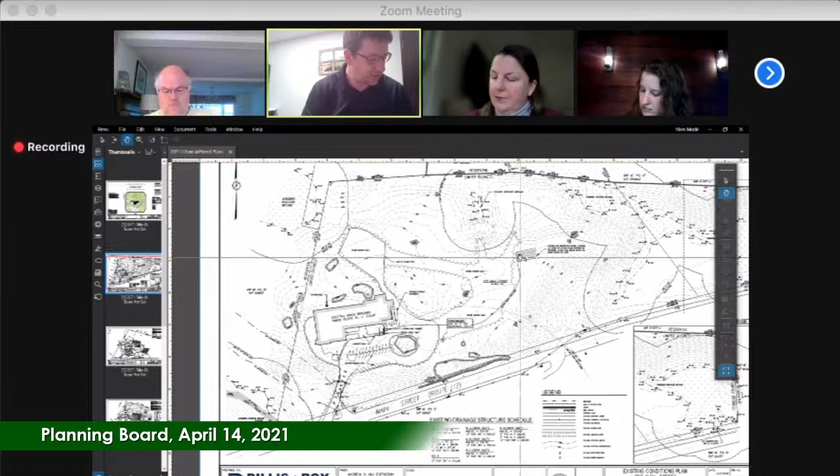What the applicant is proposing to do, we jump to this site layout plan, which is zoomed in slightly, is to maintain the existing building footprint, restripe the parking lot, and slightly expand the paved area to provide sufficient parking to meet the town of Bolton's requirements for a building of this size. There's not currently plans to have that many employees, but while we are submitting this application and doing the site work, we wanted to bring the site up to compliance with the parking regulations.

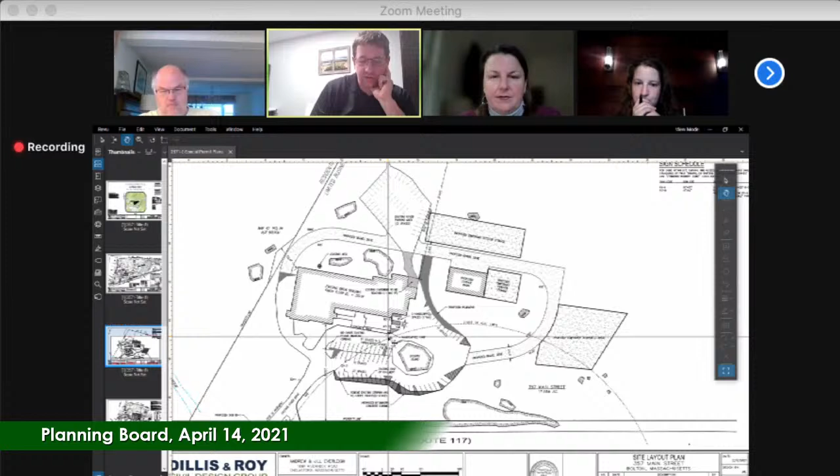All that additional pavement is shown in this gray hatching around the site here and here, and slightly here. We wanted to make sure that there was sufficient room between the existing island and the existing concrete walk to provide a 22-foot aisle through that area. It was a little tight when we were looking at the design.

We're also proposing a gravel drive around the back of the site, which will provide full access around the building, tying into some existing pavement at the west side of the building. The proposed storage barn is here to the east of the building, and then temporary storage areas for materials developed during the construction of pools are located here, and in this spot here.

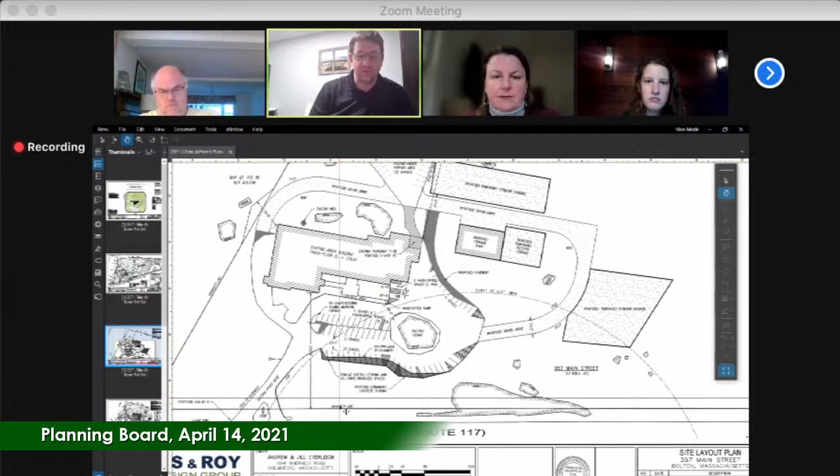It should be noted that the building itself is approximately 200 feet back from the roadway, with a fairly substantial planted buffer, well-established trees between Route 117 and the parking area and the building itself. There's also quite a bit of ledge on site, as you can see in this area. So we were somewhat limited in where we could put drainage, as we'll see on the next page. If I'm going too fast and anything pops up, please feel free to interrupt me.

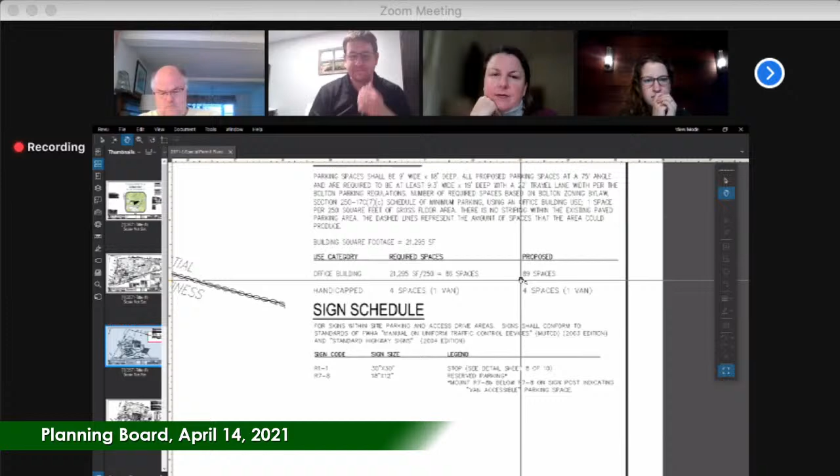Actually, this is Eric. I do have a question on the parking. What was the calculation that you came to for number of spots for parking? So with a use category of office, we came to a required 86 spaces. And when we restriped the parking area, we ended up with 89 spaces plus 4 accessible spaces. I don't have the new parking bylaw on hand, but that does seem excessive for your use. Would we consider this office? Do we have like a service category? I thought we did. Danielle, do you remember?

I don't remember off the top of my head, but I wouldn't necessarily consider this office, because, correct me if I'm wrong, you're not going to have individual offices in there, right? Or I guess if you want to describe what it's going to look like on the inside. Correct. Andrew, this might be a good time for you to step in with how you're planning on using the facility. Yeah, so the main use of the inside of the building is going to be individual offices for employees, and then we're also going to have a showroom outfitted to showcase some of the products that we use and some examples of what we do to clientele that come in.

How many offices do you anticipate having? I think we were looking to do right around 10. A lot of it's going to be open space offices, maybe multiple people in one area, not just individually closed walls. Yeah, so the idea of the latest parking bylaw was to not overburden the layout with excessive parking. So I don't know if you think 89 is right, or if you think that's excessive. We were just trying to make it a fit design. Our approach had been to come in with a clean application and not seek any kind of parking relief.

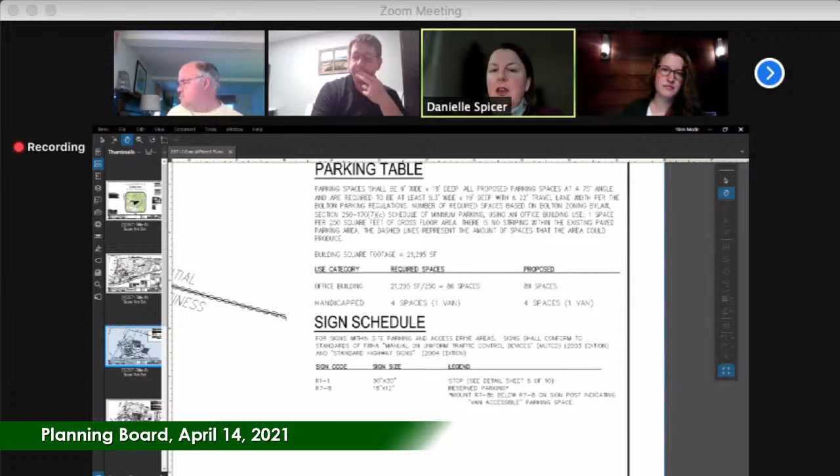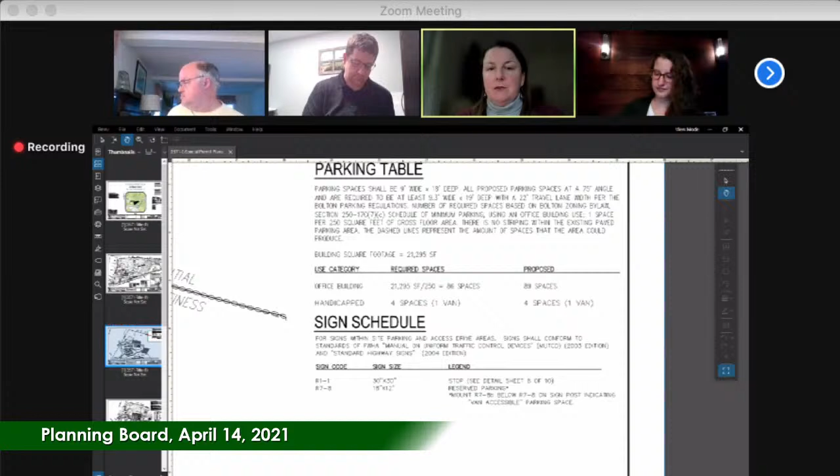Okay. You mentioned you're only going to have a small portion of this building that's dedicated to office. So whatever the square footage dedicated to office, you'd need to do the required spaces per that. But the rest of it would be looked at as a different use. And part of the whole parking bylaw was allowing these different uses to have different parking requirements, and maybe it's a shared parking. Obviously it's all pretty much one use, just different square footages.

Whereas if this had multiple different tenants, you could have a use that was really heavy in the morning versus another one that was really heavy in the evening. It doesn't make sense to just add them consecutively. It would make sense to actually offset them and look at more of a shared parking use. So there was a lot of leniency given towards developers to say, don't just call this one building, unless it was all office.

But where you've got clearly different uses within the building, like you just mentioned, 89 spaces seems absolutely excessive for this. So if it's not needed, let's look at what the actual office space is, and then what's the other category for the rest of the building. And most likely that's going to have a much smaller requirement for parking. Yeah. So if we're 6,000 square feet of office, that would be 24 spaces.

So we're down somewhere around a quarter to a third of what we're showing. You still have to add the spaces for the rest of the building. It's just going to be at a different rate. It's not going to be per 250, so what we're saying is if you look at the latest parking requirements, see what makes sense for the rest of the building.

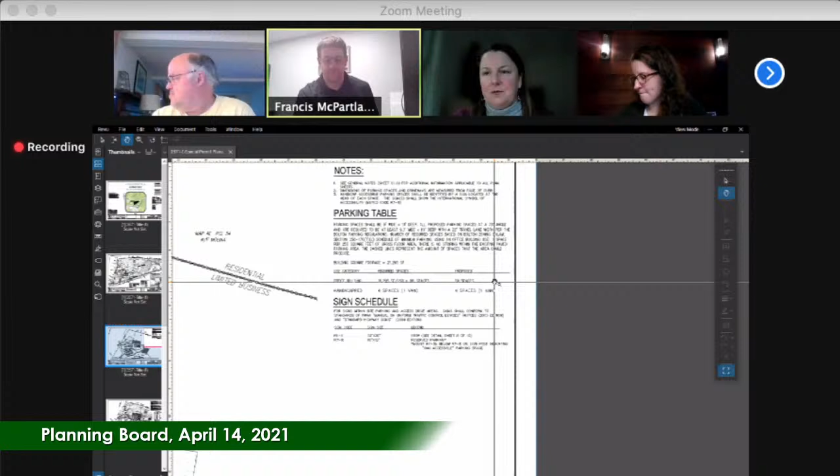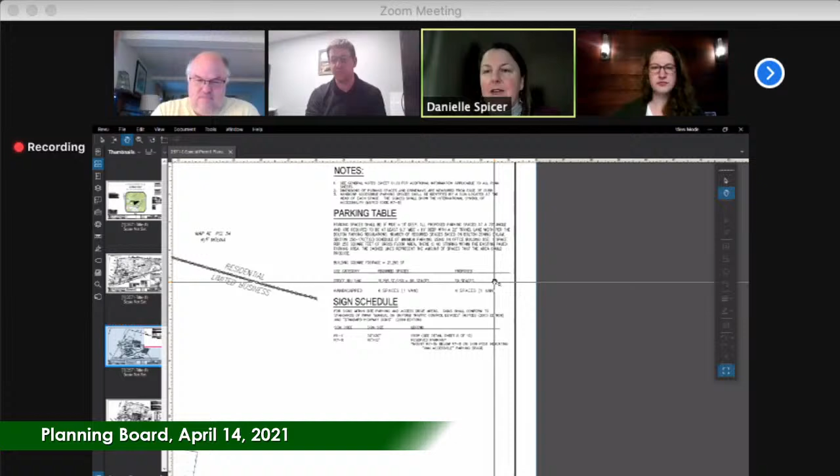Yes, and sorry, I'm bouncing back and forth between another screen trying to see if there's an easily used appropriate use. It may not be straightforward, but something that makes more sense than office for the rest of the building. It looks like there's maybe a manufacturing use that might fit, and that's 1 per 800. So even if we did that, that would put us at 44 spaces total between the two uses, which would just cut it in half. Yeah, it sounds like that would make everyone happier.

Yep, thank you. Okay, continue. Yeah, thank you for that feedback.

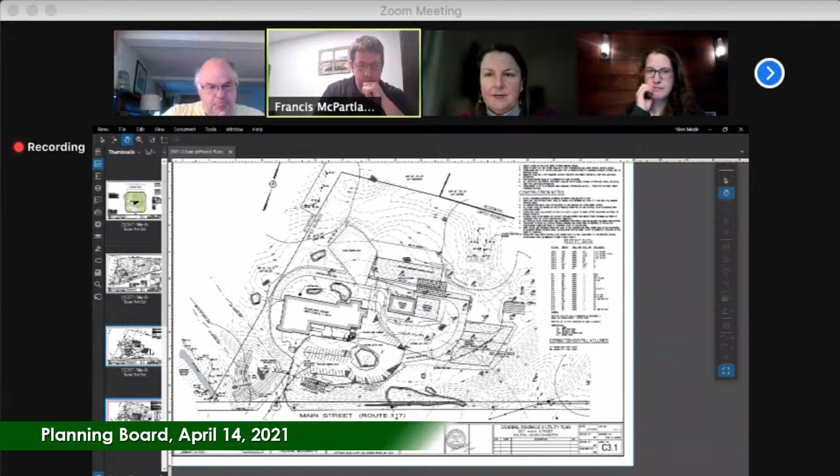Moving on to the grading, drainage, and utility plan. One question before you do. Yes, Mark. On the right side, there's a little triangle there, where the driveway is by the building. This here? No, just slightly up and left from there. Oh, where you were. This?

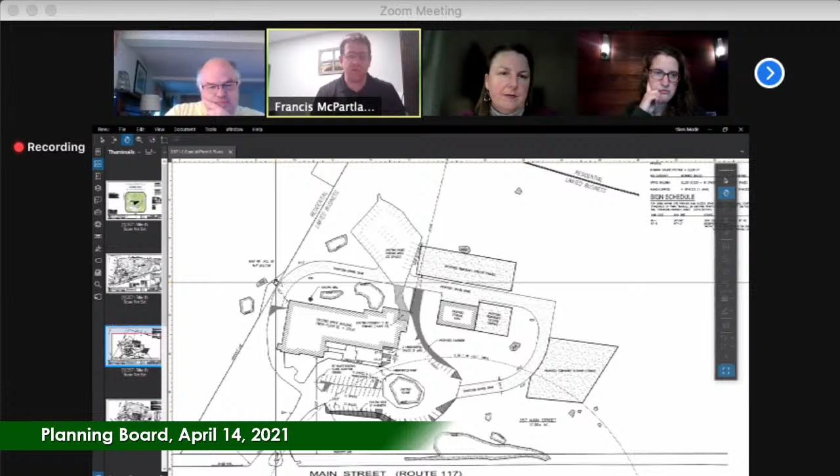Yes. At one point, well before I ever became involved with this property, it was a much larger parcel. And a good portion of that was conveyed to the town of Bolton as either conservation land or open space. So this is a town of Bolton parcel, but because of where the building was, they needed to maintain some kind of setback; it looks like the intent was 50 feet and it ended up being 52.9. So the property line, and I'll just mark this up real quick so we can see it.

Property line goes, bear with me, from along this line out to here and down and like this. Okay, so that red line is the property line.

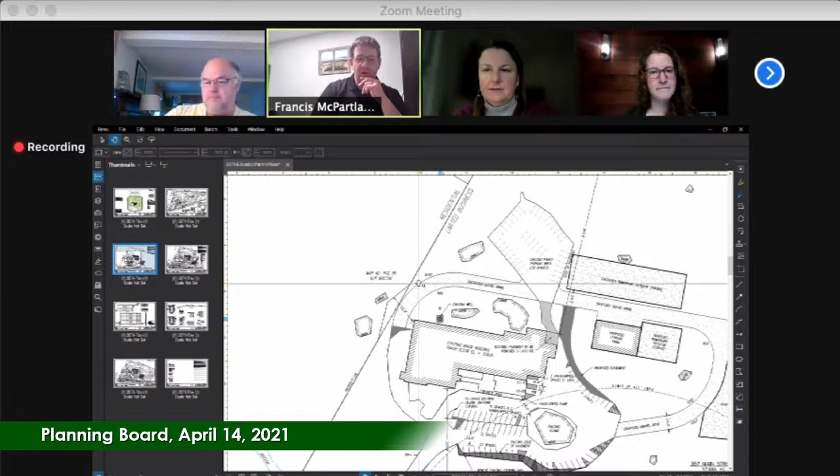So a little sliver is in the residential and the rest is in the limited business. Yes, you are correct. So that's pre-existing, so you're not looking for a land swap or anything like that there. No, we're not looking for a land swap, and all of our proposed activity is within the limited business.

Okay, jumping onto the grading and drainage plan. What we have proposed is the construction of a berm at this end of the site to create a small basin. Because what happens right now is there are 2 existing catch basins, and they just discharge right to existing grade, and that dumps right down into the wetland and the stream down here. So what we're proposing as part of our stormwater management on the site is construction of this berm and sediment forebay to provide stormwater management flow control and TSS removal prior to discharge at this location.

So will that be like a constructed embankment so that there's no breakthrough and stuff like that? That'll be a constructed embankment. We've been finding - let me check the detail before I speak here - but we've generally been finding that impervious layer barriers haven't really been needed on the basins here, so it would just be an earthen berm.

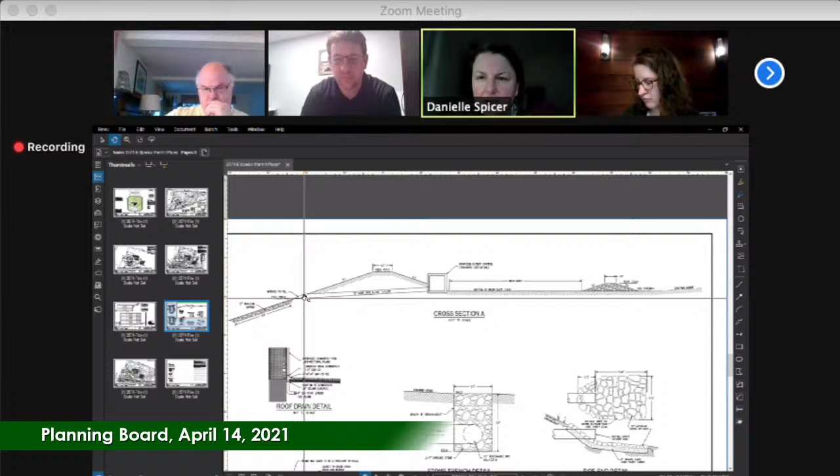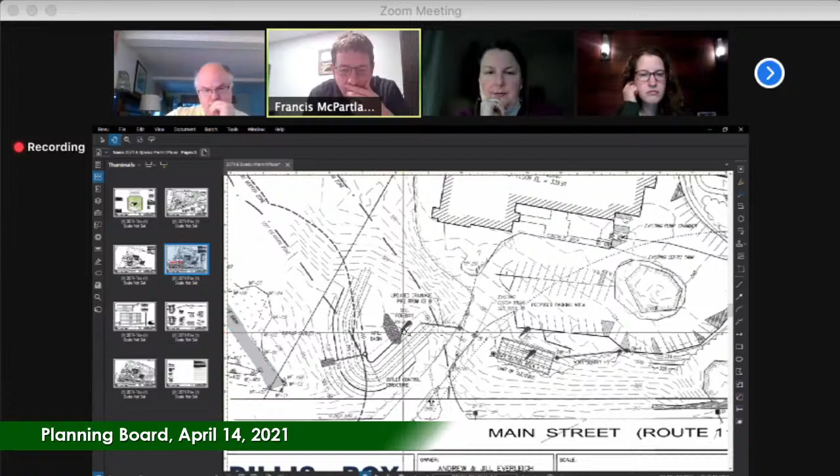Okay. And do you have, so the bottom of your basin's at elevation, I think it's 310. 310, yes. What's your depth to either ledge or groundwater? Our depth at that location, so this is constructed entirely in fill, so we're not cutting, or maybe a very minimal cut. And I'm looking for my test pit 8069.

I mean, if it's all in fill, most likely you're fine. Yeah, it's most likely in fill, 8069. We had a 74-inch deep test pit at that location, and groundwater was observed at 70 inches. And you obviously didn't hit ledge. We didn't hit ledge there, no. And if I remember right, that 70 inches roughly corresponds to the stream that's down there. Okay.

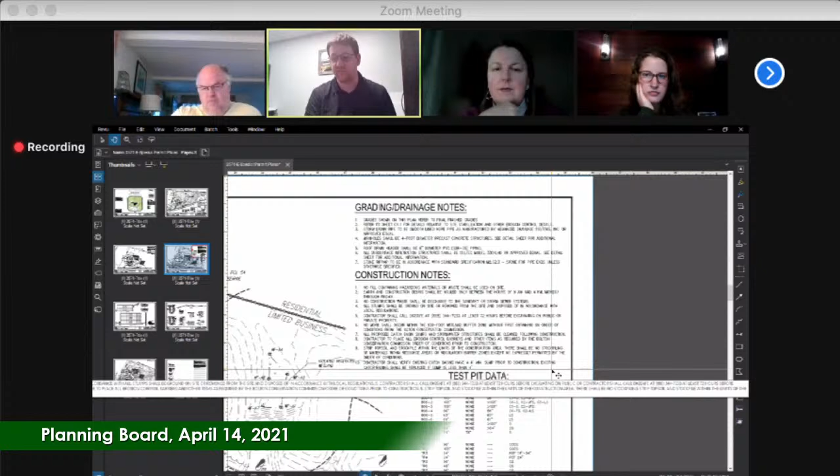Calling out on existing catch basins on note 10, we're having the contractor verify that the existing catch basins have a 4-foot sump. And if they do, we're having them be left in place, but if they aren't deep sump catch basins, we're directing the contractor to swap them out. Okay, so there'll be a full treatment train of catch basins to sediment forebay in that location.

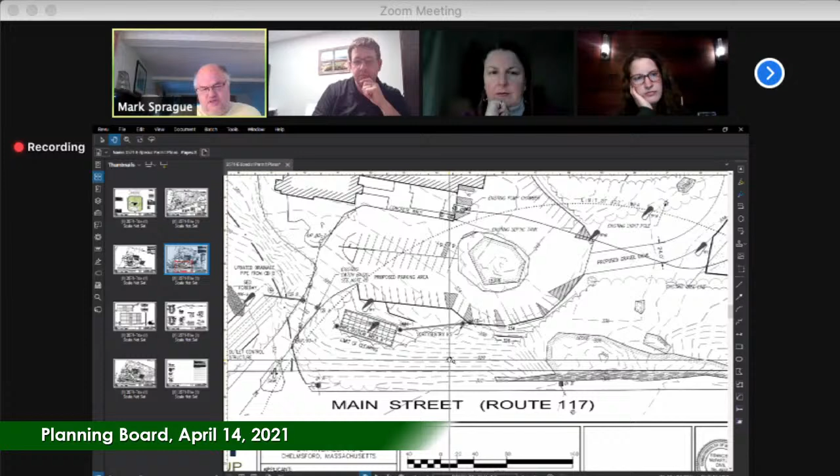So that will remove most of the vegetation that's screening the property on that side, right? On this side, the vegetation would be pulled back about to the property line. Yes, for this side.

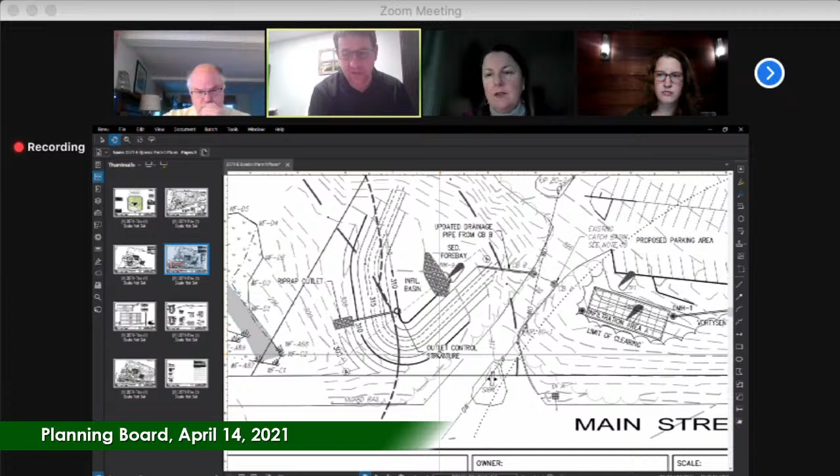And I'm assuming by enlarging the basin as well, you're meeting your peak rates for the 2, 10? We are meeting peak rates for all storm events, and that was documented in our report. But are you meeting peak rates and peak volume? We are meeting peak rate, let me see if we documented volume. I know we're meeting our recharge requirements too, so that tends to meet volume. We're not discharging from either one of the infiltration systems. So the two infiltration systems that are proposed are providing full volume, full recharge up to the 100-year storm. So I can prepare a table to document volume.

Yeah, if you can just - that was a bylaw, or that was a change, 1 year or 2 years ago, I can't remember - but to document not just peak rates for the same storm events, but also peak volumes, for both existing and proposed. Yes. I'm sure that we are, because as I said, there are two subsurface infiltration areas picking up the rest of the disturbance, as well as some of the existing parking and impervious areas, so we're fully infiltrating those.

So you've got your parking lot that's above, it's going to - was it catch basin 1? - and then it's going down to this subsurface basin, and then is there an overflow from there, or what's... This does have an emergency overflow. This structure here is basically a catch basin that if this system is in failure, or it gets more than 100-year flow that it can handle, it will bubble out there and it won't back up. Yes, and then we'll just overflow.

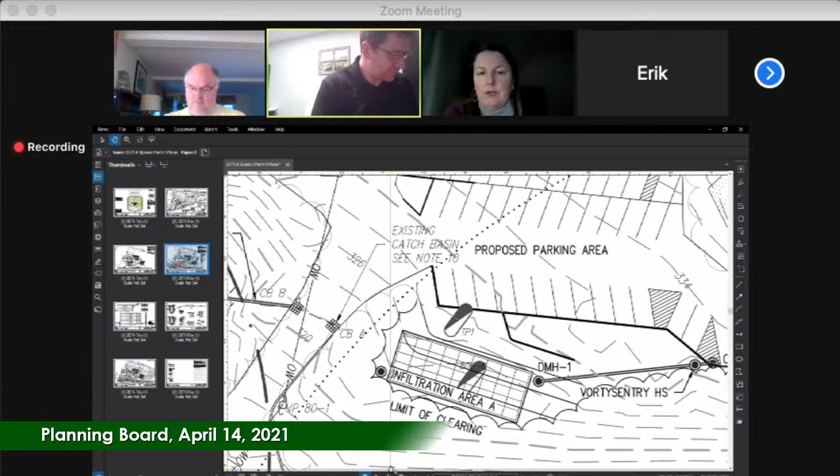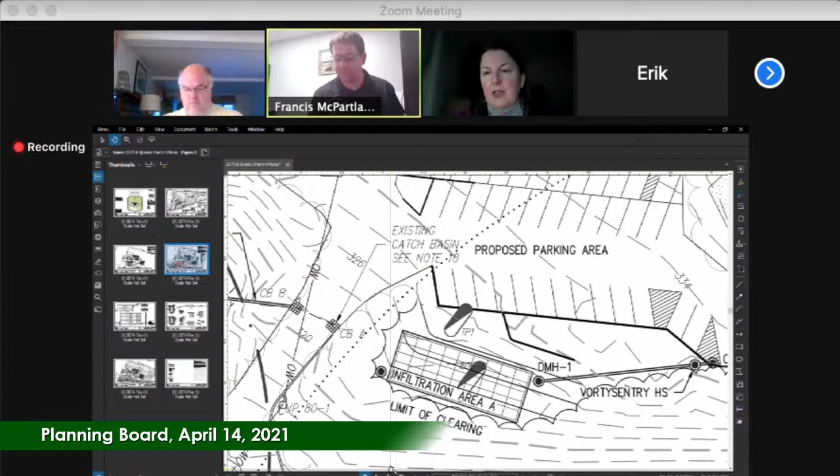I don't want to speak out of turn on this. It might be in the HydroCAD calcs that were provided, it spells out the rainfalls themselves. I just don't remember offhand what the number is. It was, we have a 7-inch for the 100-year storm, but I don't want to speak in the affirmative until I confirm. You can just follow up with that. That'd be great.

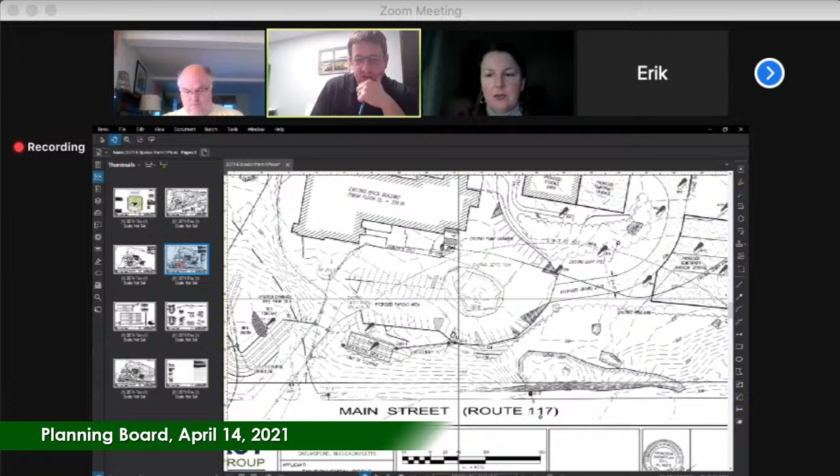So we also have in the back here a secondary infiltration area, collecting both the runoff from the proposed storage barn as well as runoff from the grading and construction in the back here.

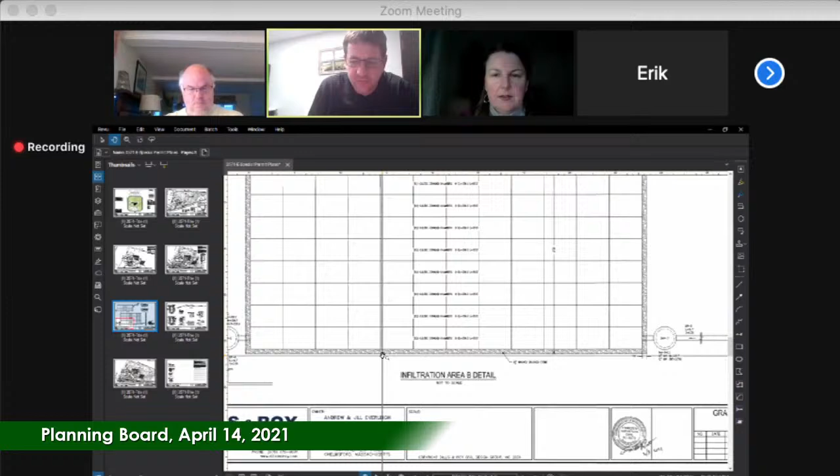So this one, I believe, would bubble out. I think this one relied on relief from the catch basins. It didn't have quite the same relief setup as infiltration area A, just because of its configuration. I'd be concerned with it having to surcharge back to the whole system if there was a large storm. I would probably look to provide an outlet control structure, or something where it doesn't have to go back and be surcharged and resuspend everything. I think you're going to have a bit of a nightmare maintenance-wise if that ends up happening.

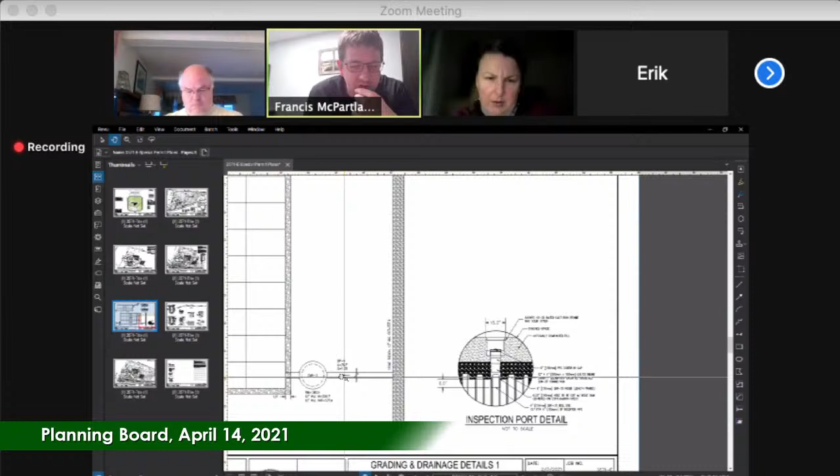So if there's a way to provide a structure, even one that has a culvert that discharges a little further away for you to daylight, that would be fine. Looking at this now, oh, that trench is collection, never mind. For a second I thought that was a potential level spreader, but that's more of a level collection trench as opposed to a catch basin.

But we could certainly put something in the back, something remote from where it comes in, to kind of bubble out. And if you don't want it as a catch basin, just having it as a structure with a culvert, putting the culvert where it can daylight, would give you some relief so that it continues to flow that way and doesn't surcharge back on you.

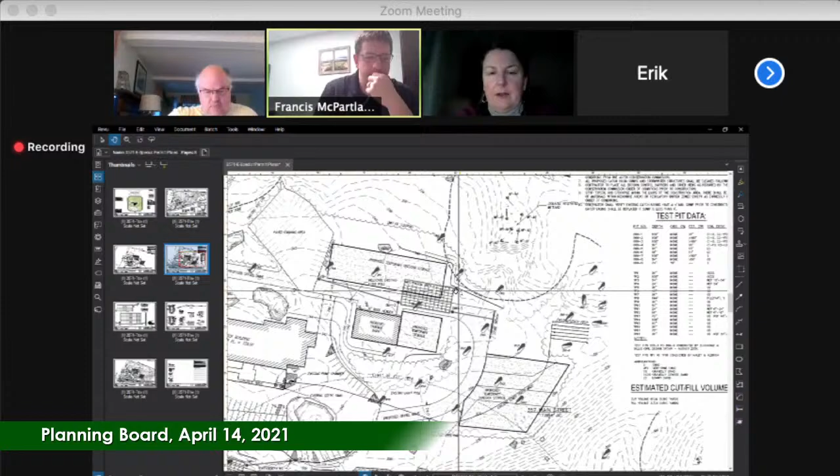So that covers those points. The site has been fully surrounded with erosion control barriers installed around the limits of where we're doing actual site grading and construction activities, placed on the downhill sides of where the work is—around this proposed outdoor storage area, down around the grading, around the basin, around this infiltration area, and around the toe of the basin.

So at this time, I'd like to turn it back over to the board to see if there are any other questions about what's been in the packet or presented tonight, or anything you're looking for clarification on that we haven't covered yet. I've already asked my big questions, so if other members of the board want to jump in, go right ahead.

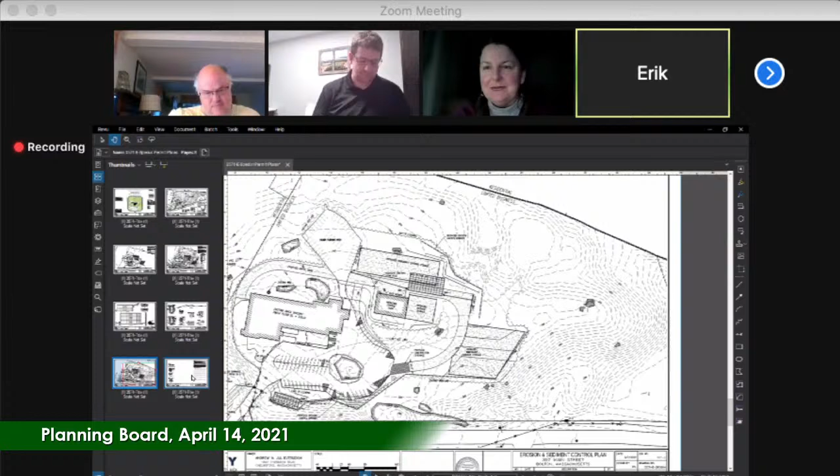I think as part of the special permit, we typically ask about lighting. Lighting's one, what else? Hours of operation. What else do we ask? Turn a light on.

Do you have a lighting plan here? I don't know if we have a specific one. Were we maintaining existing lighting around the building, or planning any upgrades? There is lighting around the building, and we talked about potential lighting on the future barn, as well as low voltage lighting within landscape beds in front of the building. But no plan for tower pole lights in the parking area, anything additional beyond what's already out there.

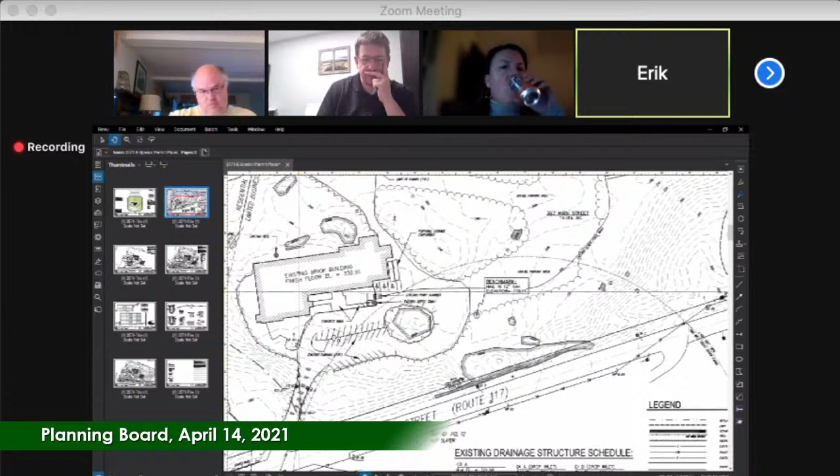Well, whatever lights you add, we typically ask for full cutoff fixtures. LED is nice, I think. Yeah, I envision all the lighting we do against the building is just low voltage landscape lighting.

Our typical business operations are Monday through Friday, between 6 a.m. and 5 p.m. So you're pretty much, other than sometimes in winter, during daylight hours anyways. Correct. What time does the showroom parking start? Typically we have crews rolling in around 6 a.m. As far as hours, the showroom part might be open into the evening by appointment, or generally not. I could see that by appointment only, maybe on a Saturday here every now and then, but all the activity typically happens within business hours. And nowadays with the Zoom stuff, we probably really mitigate foot traffic compared to about a year ago.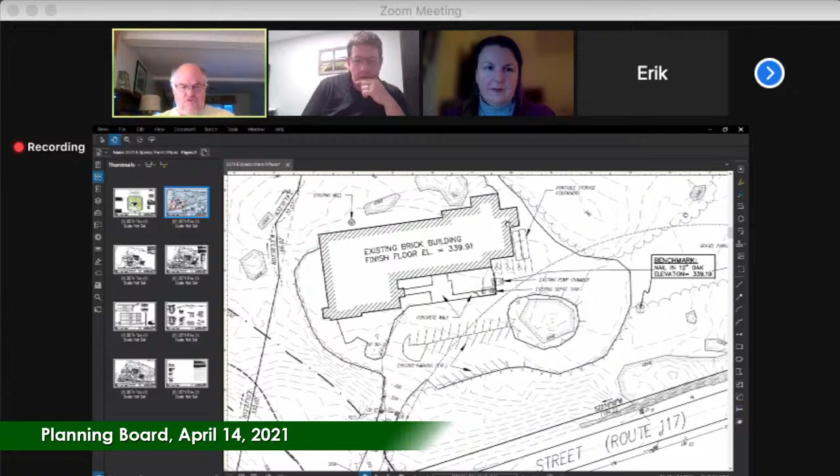What does the drainage along Route 117 look like? I was wondering about the overflow on the new infiltration area, whether there's sufficient drainage to drain it away and keep it off the road.

Well, in the event that it overflows, it would run down to a drain inlet A that's called out here, that would be the first point of relief. But if this is being inundated, the street drainage itself would likely be inundated as well. Mark, with our new regulations requiring them to meet peak volumes, whatever is getting to that catch basin should be equal or less than what is under existing conditions now. Not just the rates, but the actual volumes as well, so it shouldn't be anything more than what we'd see under existing conditions.

I was wondering if it was worth tying the overflow into the other catch basins, as an emergency, if that infiltration area gets jammed up or something, as a kind of emergency overflow. You're suggesting a pipe from infiltration area A to the infiltration basin, across the driveway? Yeah, or into the existing catch basin, which will be plumbed in there as well. It's just a question, I'm not sure if it's needed or not.

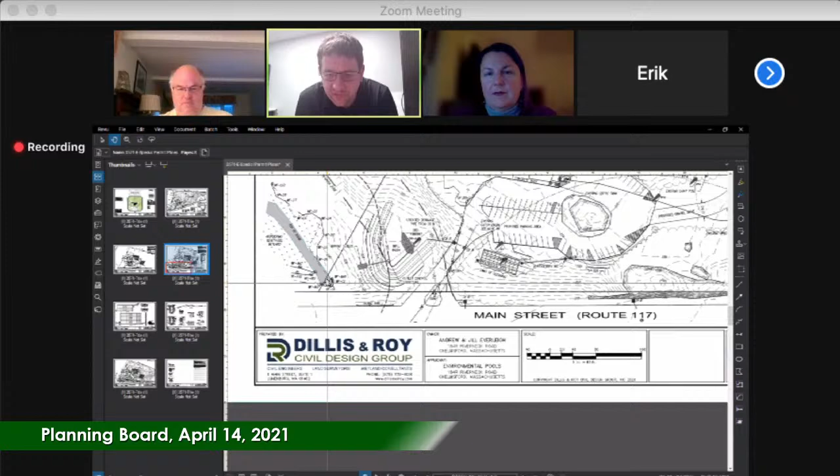Some might get to 117, but there's not a lot of topography on our plan for 117. This is the 310, see the shape of the contours there. So there's kind of a gutter line heading down this way. So anything that bubbled out of infiltration area A in a storm event in excess of the 100-year storm would be flowing down towards the stream there.

Are there currently drainage issues right now on the site that you guys are trying to bring up? Not that I'm aware of. I'm just, we're adding more impervious area and removing some of the vegetative cover, so it's always a little bit of a concern, but I haven't been by there in a 100-year storm to see if there's a problem or not.

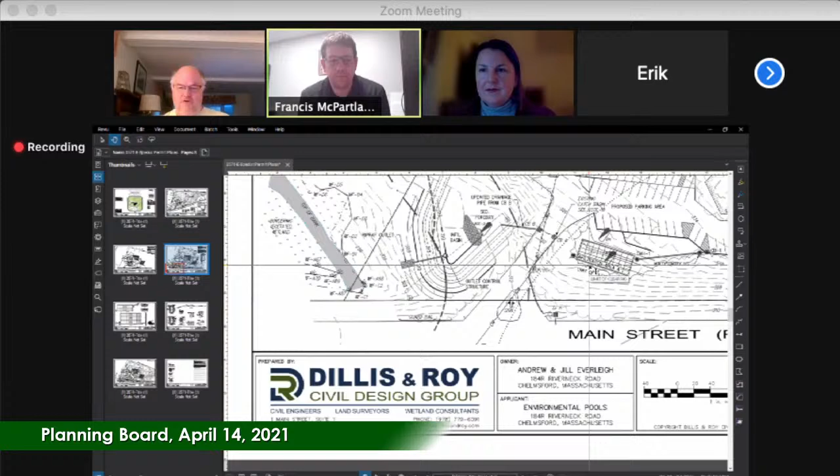Were there other questions or comments from the board? Is there a planting plan around the embankment for the basin, or is it just going to be grass? We've proposed grass. This will be going to conservation, so we'd like feedback on what would be planted in this location, and we'd like to work with them on that, because it's within the 100-foot buffer zone.

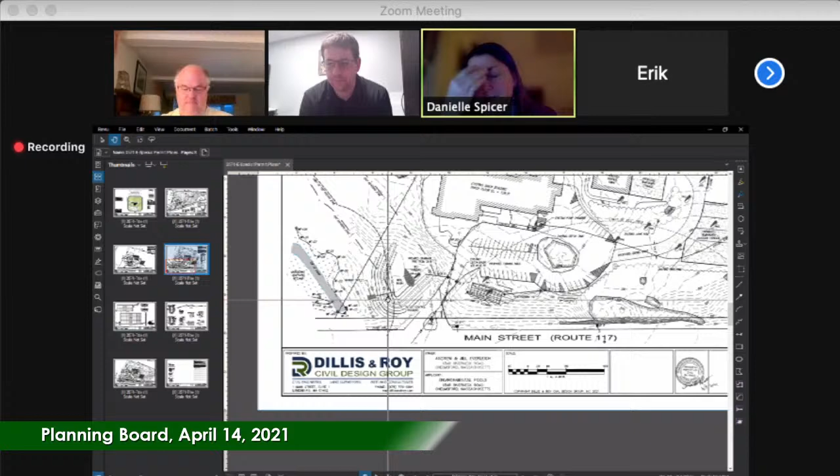How deep is it? How deep are you building this berm? The basin is 5 feet deep. All right, so that's pretty deep.

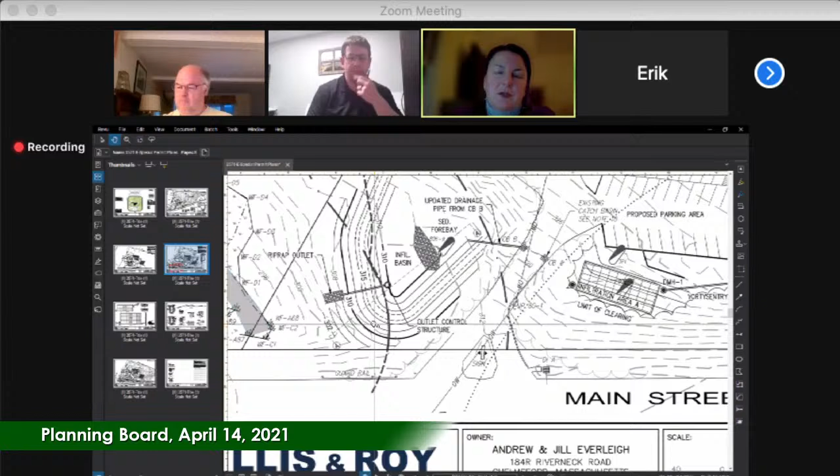Will you be proposing a fence around that? I guess what is the elevation that the 100-year storm ponds up at? Is it at the top of it, like at 5 feet? Or do you have freeboard? Yeah, the 100-year would pond at... bear with me, that's supposed to be on that detail. The 100-year ponds at...

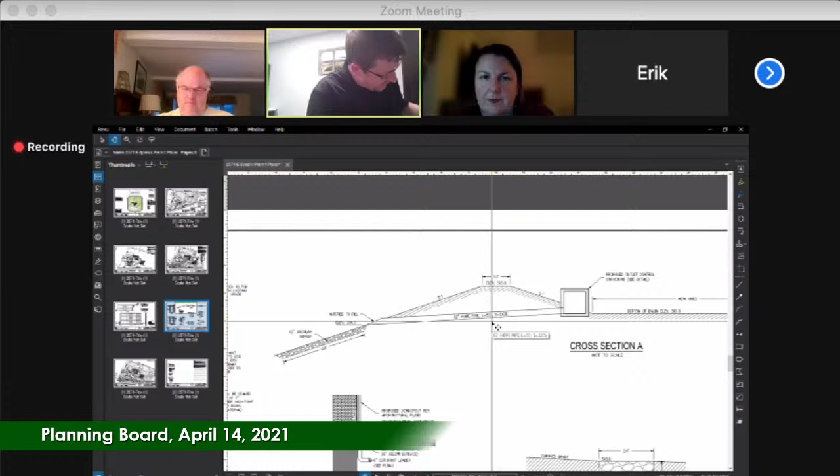313.84. So it ponds at 3'10". So you still have a foot of freeboard. We still have over a foot of freeboard there, yeah. And it's 3-to-1 slopes. Okay. Yes.

Yeah, it would definitely be good to see if there could be some vegetation proposed other than grass along the slope, but I would leave that up to the Concom for what they might want to provide or require. But just with a lot of the loss of trees right there, if there's other things that could be installed, that would be great.

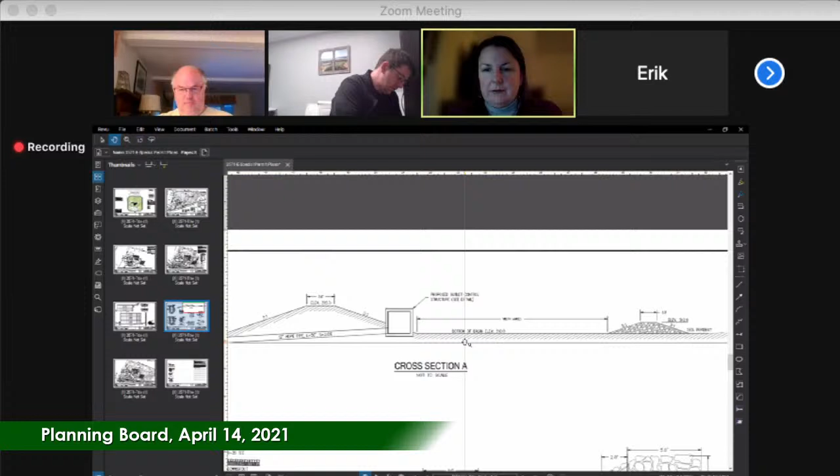Yeah, I wouldn't want to do trees on the berm, just because I've had that cause wicking problems with the roots and lead to failure. But maybe some other kind of shrub planting or something might be appropriate. Yeah.

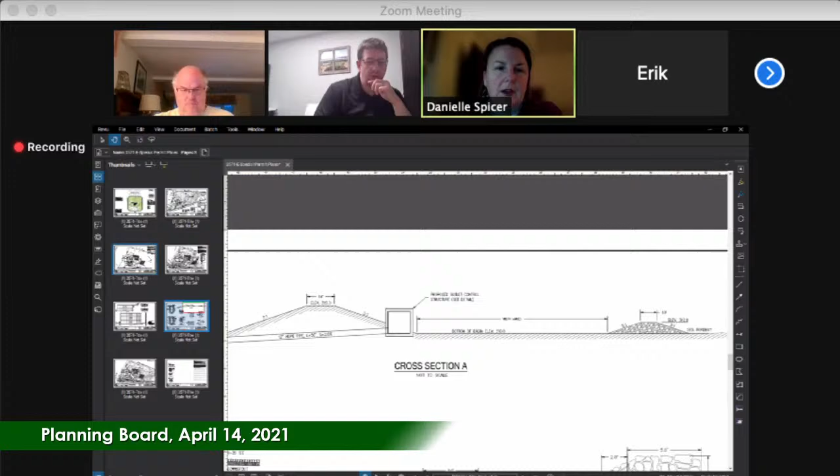And do you actually have a landscape plan, or are you proposing landscaping? No, we had asked for a waiver on submitting that, given the existing buffer that would be maintained along this side of the property, and how far back the building was pushed. Andrew, are there existing plantings around the building? They had the existing plantings along the front side of the building, yeah.

Any other questions or comments from the board? Not hearing any. Are there any questions or comments from members of the audience? And I don't know if everyone's able to unmute themselves. If you're not, you can always raise your hand. But not hearing any.

Go ahead. Are you planning any changes to the exterior of the building, or you'll keep the facade the same? Yeah, we plan on just keeping the facade the same and cleaning it up. Okay. The very last page of the application packet has a mock-up from the architect of what the building's going to look like on the front.

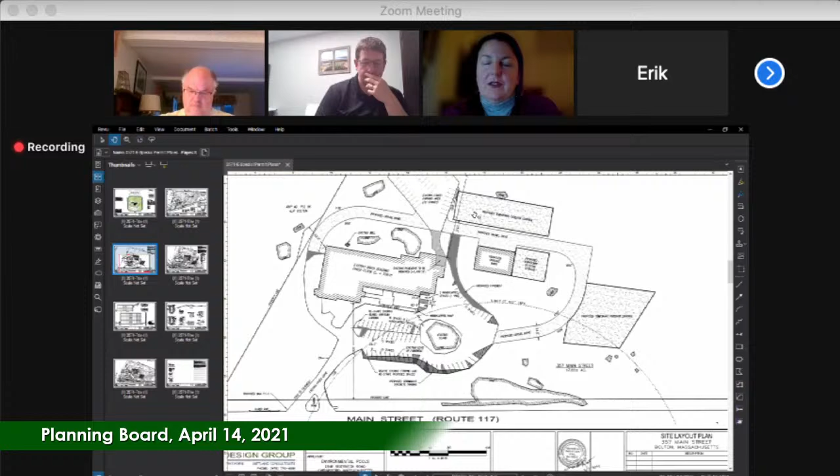Hello, can you hear me? This is Ed Shankle. Hi, Ed, please go ahead. Hi, my wife Joan and I are watching this, and we're residents on the back end, so that's more where our interest lies. That's fine. Can you first state your name and address, please? 277 Main Street.

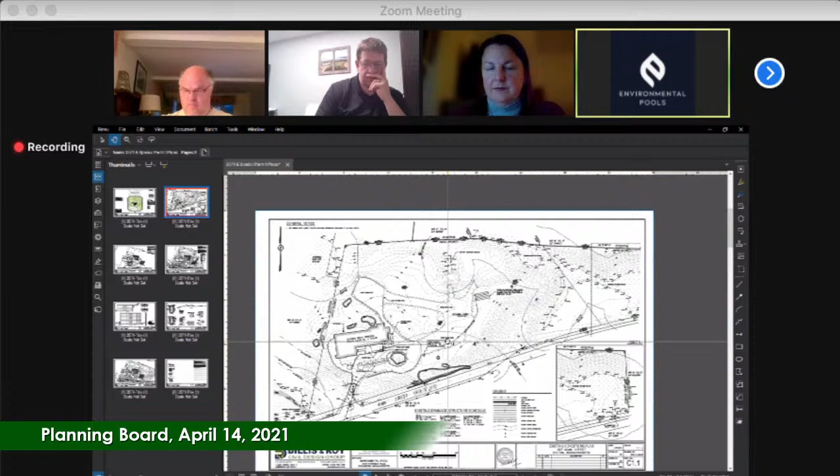Thank you. Okay. So on the back side, first question is, you spoke about the lighting and the type of lighting. Would that lighting be on throughout the evening for security purposes on the new storage barn in the back? We plan on having the facility locked up in the front with no access getting to the back. So we don't plan on having lighting throughout the whole property being on overnight. Okay, that's good to know.

On the temporary storage area that's adjacent to the barn, I think it's right behind it if I remember correctly. Is that going to be open racked storage, or is that just ground level storage? Yeah, we have open rack storage, so it's going to be somewhat of both. We have open rack storage for PVC, lumber, and some rebar.

And will there be tree removal going on to support all that back there? I think on the plan there was a limit of clearing. Yeah, we did have limited clearing work back there to allow for the storage to happen.

All right, sounds good. One thing I'd really like to be able to do, if at all possible, is just do a walkthrough with somebody on that back end, just so I get a sense of where everything is going to be. Obviously that's not a legal requirement or anything, but simply to help me understand a little bit better what it's going to look like.

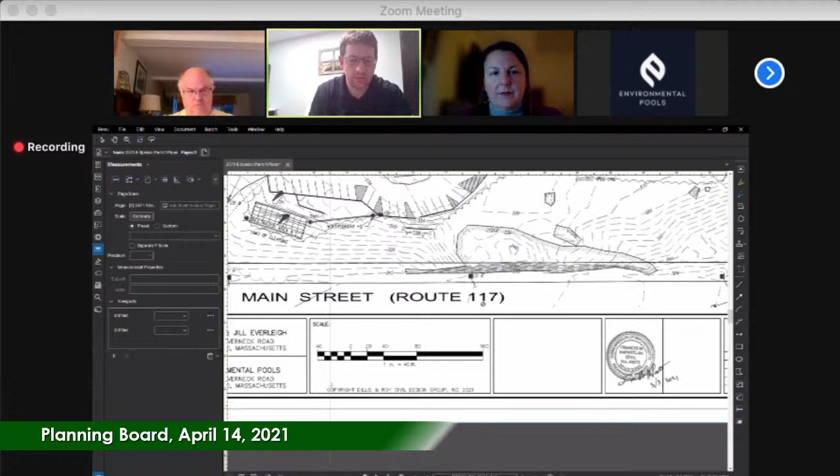Sir, where's your property again, if I may ask that through the board? Yeah, we're one of the properties right behind. The one uphill from us is the Molinas, and we're just downhill from them. So it's probably where you're zeroing in right now. Probably about here. If I could just calibrate my drawing here, to make sure my distances are right.

While he's doing that, out of courtesy for everybody in the area, I have no problem walking the site with you guys and showing you what the vision is and what we see. Obviously looking at something on paper is a little bit different than walking the site, so I have no problem setting aside time to do that. That'd be great. I really appreciate that. We have sort of an uphill view of the property, where the stream is between us and the lower property, and we're sort of looking up.

So I'm just trying to get a sense of what we're going to be looking at. So we're maintaining about 160 feet of existing vegetation along that back property line. Just for reference. Yeah, it looks like there's an area up there that I don't know if it was just cleared out or just used to put some trees and such that were cleared out, sort of stacked up. And I'm trying to get a sense of where it all fits relative to that.

But anyway, was that Erik who was responding to me about doing a walkthrough? This was Andy, the owner of Environmental Pools. Oh, okay, yeah. So if we could arrange that, that would be terrific. How would I best get a hold of you to do that? You could call my office, or if you have an email, I could take your email. Sure, it's EJ Shankle, SHANKLE, @AOL.com. SHANKLE@AOL.com. Right, okay. I'll shoot you an email. We can set up a time.

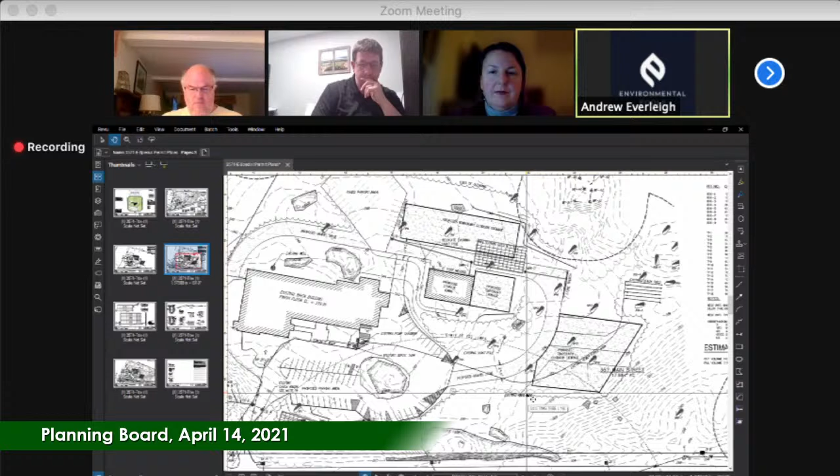Danielle, maybe you have a better opinion because you're on the design review board. But in this case, if it's not really visible and it's just intended to be an industrial storage area, I don't know. That's where I was a little bit hesitant, because again, the existing building is remaining. The proposed barn is small, it's further back, it's hidden from the road. And the rest of the components that are closer to the road are more stormwater and Conservation Commission related. So if someone felt it was appropriate to put it forth, I didn't want to say no, but I don't necessarily think that this is a definite one to go in front of them.

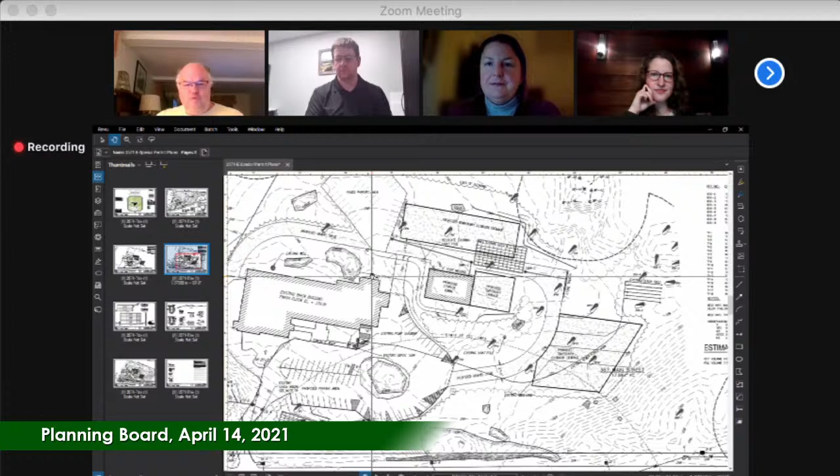Yeah, if it's just like a corrugated metal, I don't know what design review board would even do. I don't see a need for it. Okay. What's the size of the barn? I think it's 50 by 80. Yeah, 50 by 80, so 4,000 square feet. And how tall is it going to be? Andrew? I'm not exactly sure what the peak elevation is going to be. Okay.

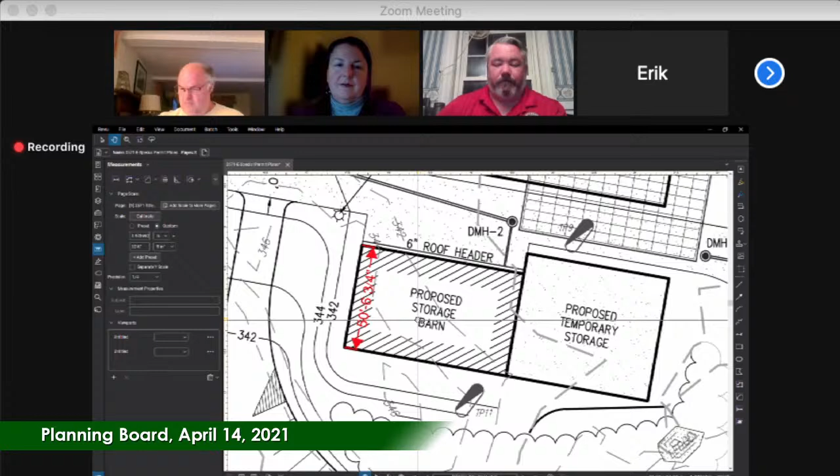You don't plan on having like high bay storage or anything, right? No, I envision it being a steel structure with garage bays on one side, but just an open concept in the front. That's it. No offices, nothing. Just a complete storage with garage bays. Yep. And those garage bays would be on the north side of the building. Correct. So with 117 being far to the south, you're not going to even see the garage bays. No, you won't see the garage bays.

And that would be where any of the security lighting would be, right, Andrew? Yeah, correct. The lighting would be on that. But then again, I'm not looking to have lighting on at all times, especially with the fact that I want to have a gated entrance.

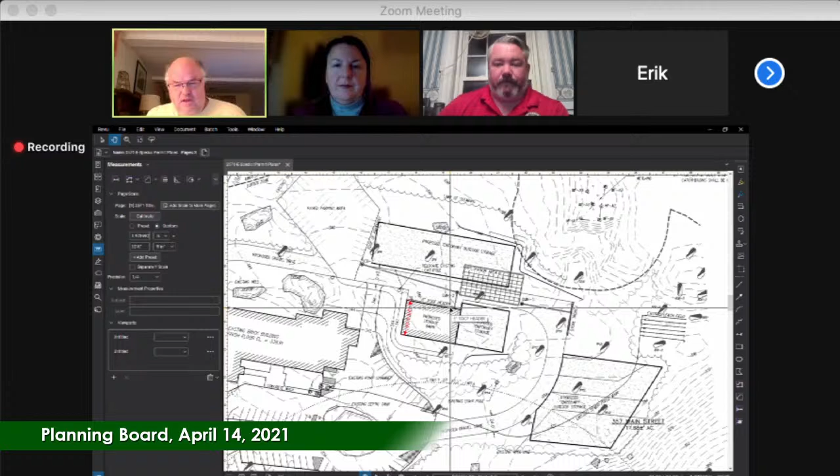Now, are you looking at a berm around the back of your temporary storage areas just to contain any rain or any liquid that gets onto those, and keep it out of the wetland areas? So like the outdoor storage adjacent to the garage? Yeah, around the temporary outdoor storage. That's all low lying storage for the most part. I'm ideally going to be utilizing concrete blocks to mitigate anything. It's all going to be self-contained in a concrete block storage type setup, so there's no way that anything can run off from where we're storing our different material. Okay.

Okay, well, I heard a couple saying that we didn't think that it needed to be DRB. Is there anyone on the board that feels that we should send it to DRB, or should have DRB review it? Okay, so I'm not hearing anything. So I think this one's okay. Valerie, if you want to note that we don't need to recommend DRB for this one.

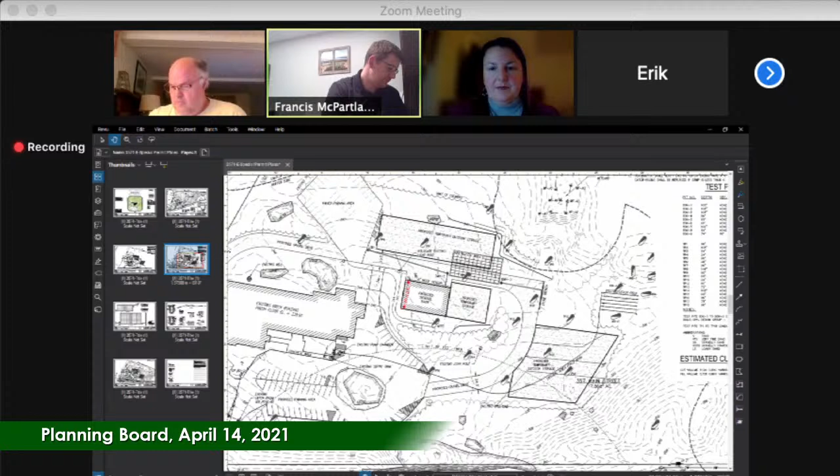And Valerie, I meant to ask you, who is the peer reviewer? It's Places Associates. Places, okay. So I guess the question would be would this be continued to the next hearing, or does it make sense to continue it a little bit longer? Valerie, do you know when we anticipate getting our peer review information back? Given the transition of my position, I actually had asked to see if it could be in by the next public hearing. We had sent it not too long ago. So April 28th was the idea, but I don't know if the applicant has heard other ideas here that might lead to further consideration of site planning.

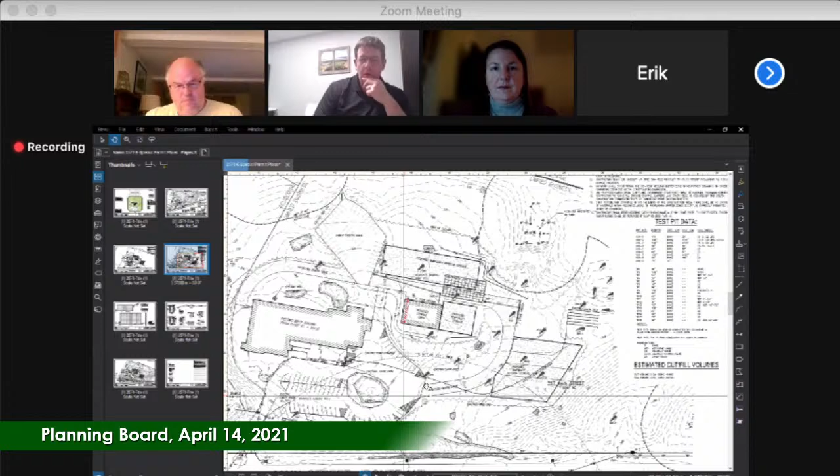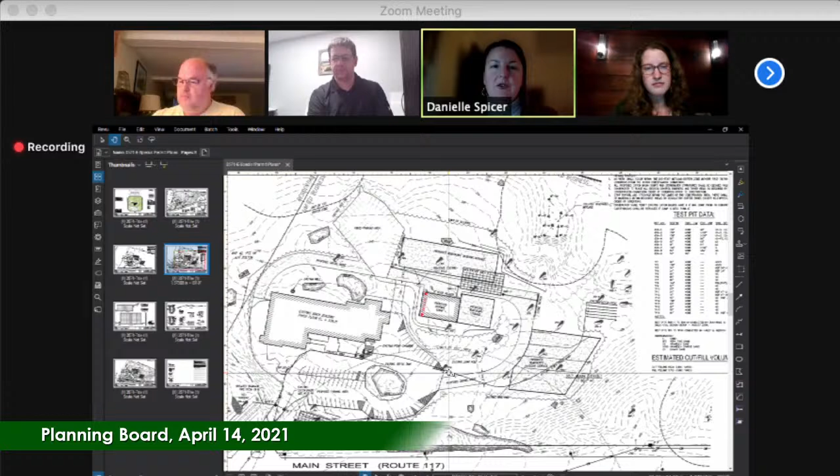Well, we will have to do that parking evaluation as well as get into conservation. Yeah, I was gonna say continue it because I think the parking could probably really be reduced. So it'd be good to see that the next time we can schedule. Well, you can continue to wherever you want. If you want to continue to the 28th, and then if you need to go further, you just need to let Valerie know. That might be the easiest thing. Yeah, right now we'll continue to the 28th. Valerie, I'll send you a letter tomorrow or Friday. And then if need be, we'll bump it. Okay.

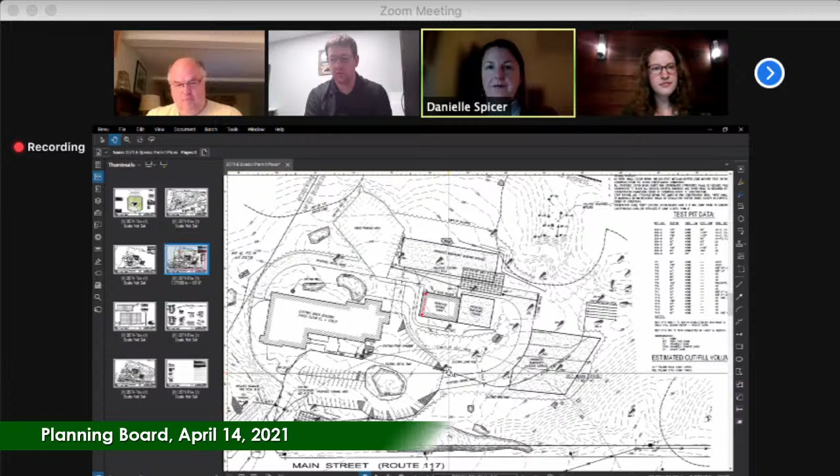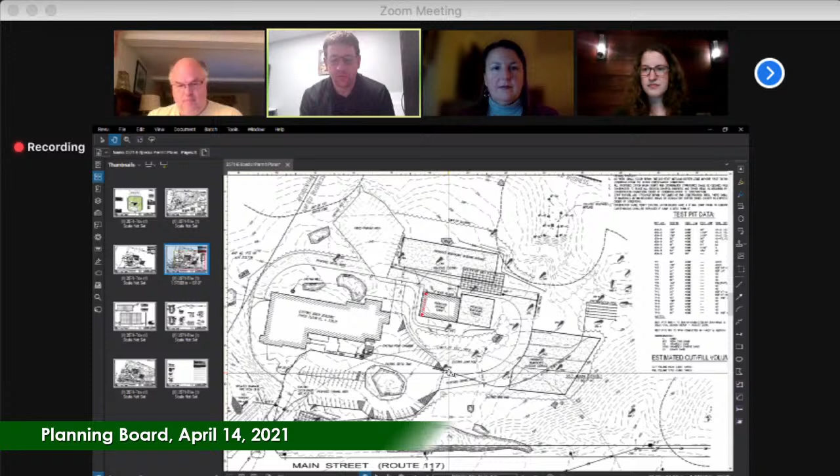And if you need any help interpreting the parking bylaw, we can help you in the interim. Okay, I appreciate that. When I come up with an approach, I'll forward it and make sure that it passes muster before we put pen to paper, as it were. Yeah, Ray, I wouldn't want you to have to wait until the next meeting, and definitely be interactive about it. Send your calculation to Valerie.

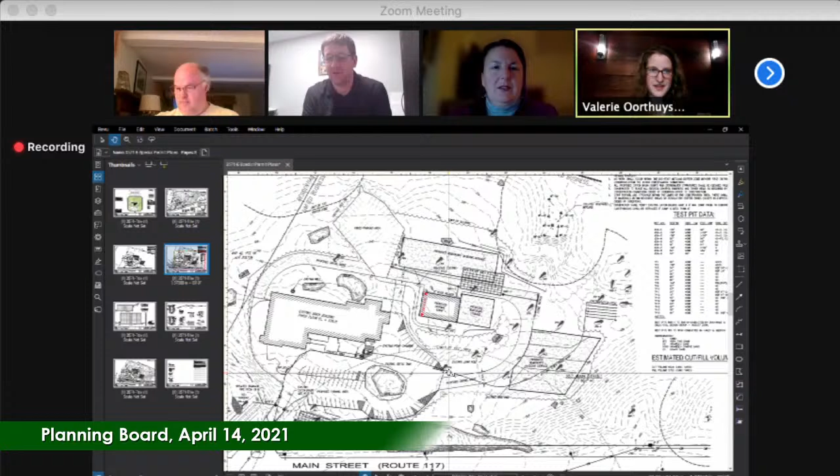All right, do we need a motion to continue? Yes, we will. I think I have to request it. I would like to request a continuance to the April 28th hearing. Can someone put forward a motion? I'll move that we continue this to April 28th at 7. Valerie, do we have anything else on the agenda yet? Yes, we actually do. We do have a public hearing at 7. So if we want to continue to 7:30 or 8, I think 8 might be best. Okay, I move that we continue this to April 28th at 8 p.m.

28th. It's not crossed off, right? Sorry, it's... You just muted yourself, Danielle. Sorry, I think I got muted, but I was just gonna say, was there a second? I missed the second. I seconded it. Thank you, Erik. And then Valerie, if you can do a roll call for all those in favor? Sure.

Peter Driscoll, aye. Michael Gore, I'm sorry, no, he's not available. So Erik Nyland, aye. Danielle Spicer, aye. Mark Sprague, aye. And James Barr. Aye. All right. Jim, you will be voting on this one. Great, thank you. Thank you, everyone. Thank you very much.

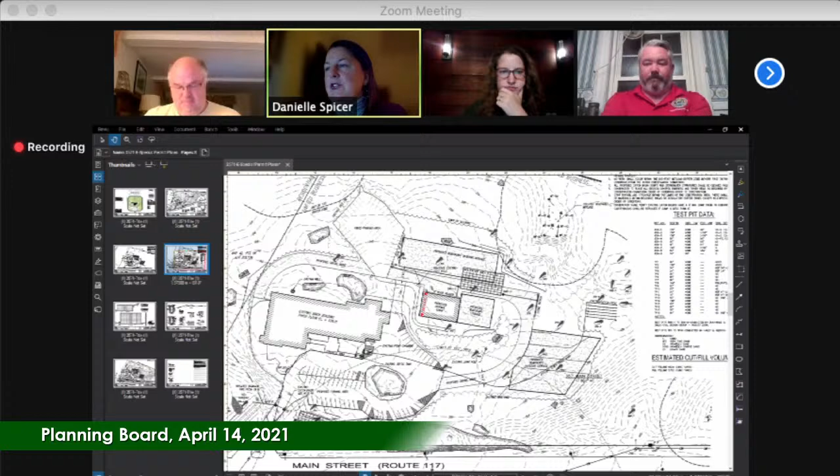So we're gonna jump onto the next one. The next hearing: the planning board will hold a public hearing pursuant to Mass General Law, Chapter 41, Section 81Q on Wednesday, April 14th at 8 to amend the Town of Bolton subdivision rules and regulations and the Town of Bolton Design Review Board rules and regulations.

So with the Bolton subdivision rules and regulations, if you've got the subdivision rules and regulations up and can just kind of walk through the changes that are being proposed, that would be great. Sure. So I think they start farther down on page 19. Sorry for all the scrolling. Yeah, it's okay.

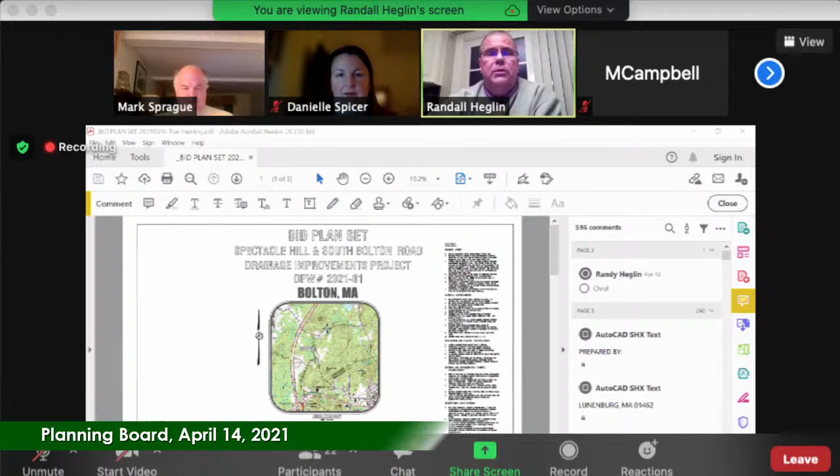If I can do a screen share, we'll take a look at the plans and give you an indication of where the trees are located. See if this works. This is the drainage project. Trying to get to the next page.

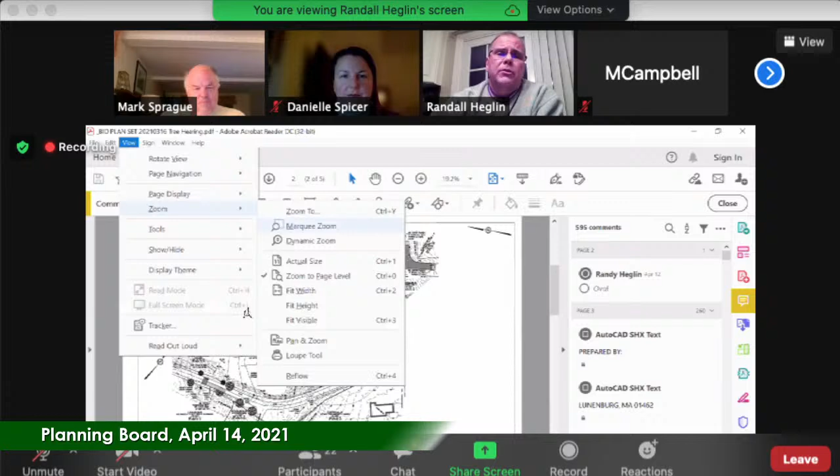I did highlight this for the board, and I think Valerie did send a copy of this with your package, highlighting the area where these trees are located. Apologize for the awkwardness here. That's okay, we can see the plan.

South Bolton Road is on your left-hand side of the road. This is Spectacle Hill. Century Mill Estates is to the right. There's this cluster of trees right in this area that are being removed, or proposed to be removed, as part of this project.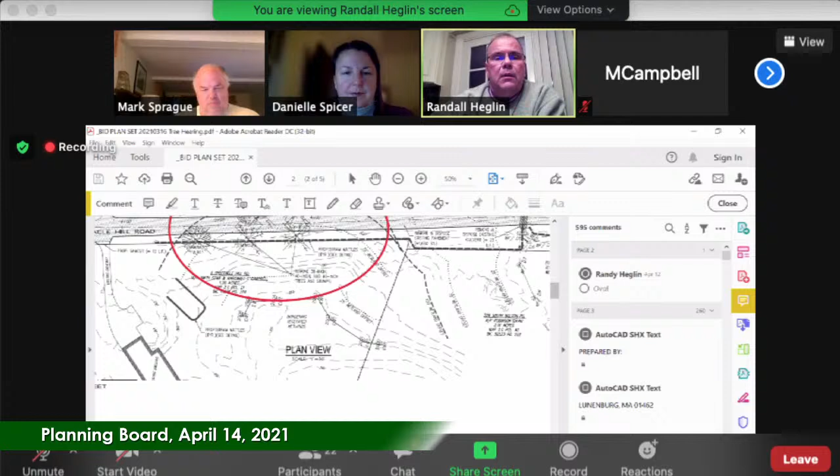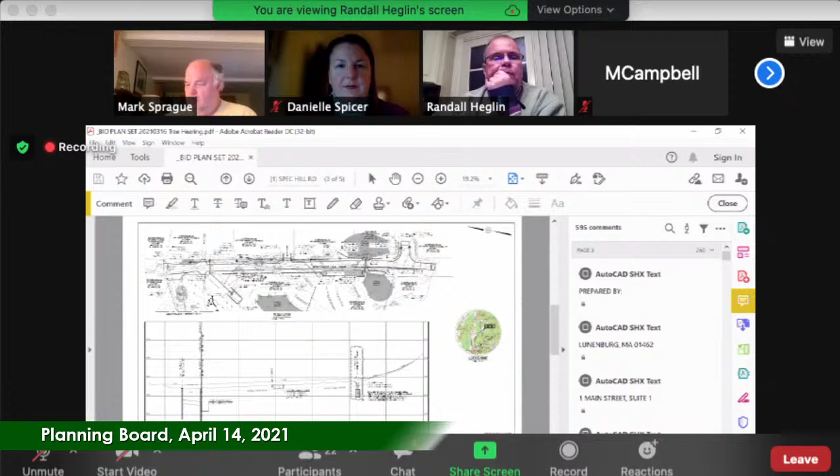If I go to the next page, it explains a little bit about the design. Probably Frank is the best to describe the design. I do have some pictures I can show you of the affected trees. I don't know, Frank, do you want to cut in here? Certainly, Randy. Actually, if I may jump in and share my screen myself. Randy, if you stop sharing, I can jump in. I did, thank you very much.

So what I'm showing here is the grading plan view for this area, the cluster of trees here and here. The trees on the 12 Spectacle Hill Road side are directly within a proposed roadside swale, which will convey runoff down to a catch basin across the street, and then through a drainage easement to a stormwater discharge, and eventually into the wetland in this area. So the trees on the 12 side are directly in the way of construction of that swale. The trees on the 5 Spectacle Hill Road side will be impacted by the roadway construction itself. One of the things we're doing in this area, from Spectacle Hill Road down to Century Mill, is picking the road up about a foot in centerline elevation. That's in part to prevent it from being flooded over, as well as to provide cover over the proposed replacement culverts down by Century Mill Road. So the roadway construction would significantly impact the root structure of the trees on the 5 Spectacle Hill Road side, and while not directly in the way, it would impact their health and essentially kill them.

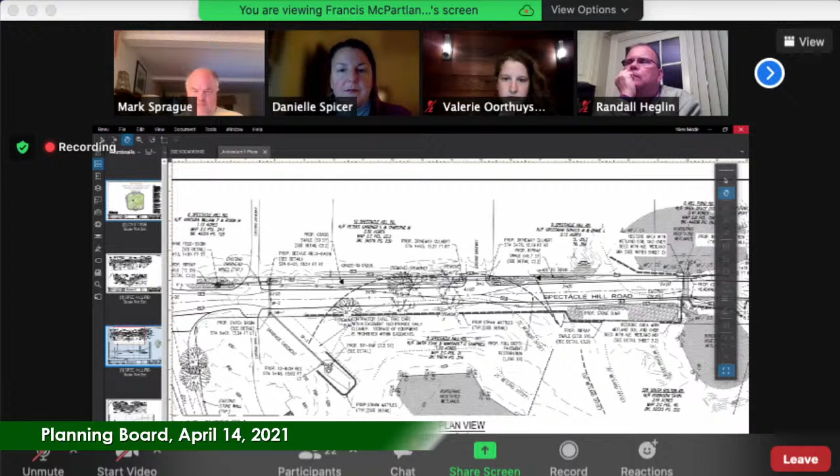One thing that I was surprised wasn't covered here with regard to the scenic road: it's supposed to cover destruction of stone walls also, which there appears in this picture to be some of. Was that going to be addressed at a different time? Just of note, this is one of our earliest roads, and there's actually a stone there that has a date in it of 1787. We certainly want to see as much of that preserved as possible. So if somebody could speak to what's going to go on with the stone walls, if it's not inappropriate, I'd appreciate hearing about it.

I'm going to be evaluating the design with respect to the stone walls, trying to mitigate as much of that impact as possible over the next few days, and then I'll be in discussions with Randall about that.

Will there be other public meetings? If we have to do something within the statutes, then yes, we will end up having another public meeting about that. It definitely seems like it is, because it does say destruction of stone wall. So, okay.

Yeah, it is. And my goal is to avoid doing any damage to the wall. If we can keep all our work between the walls and adjust the swale on the number 12 side of Spectacle Hill without disturbing the wall, that would be my goal. I prefer not to, because I did see that one stone with the date on it. That would be my goal, is to try and avoid that wall in its entirety.

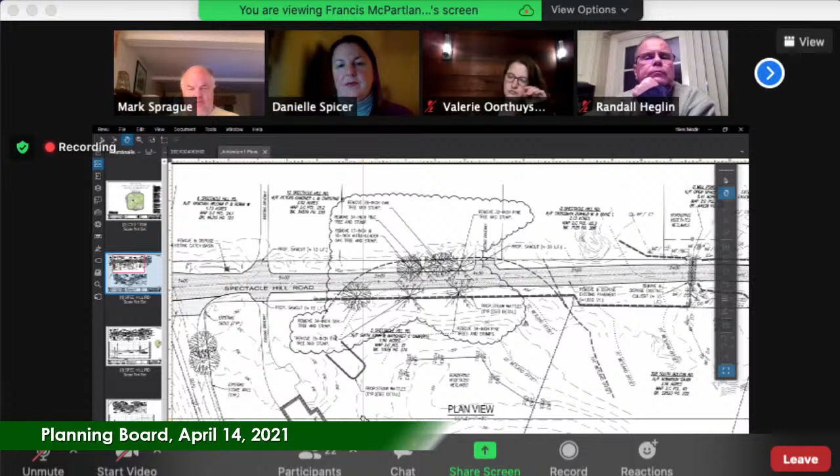Well, this is Margaret Campbell, also from 5 Spectacle Hill Road. And definitely the flooding has been reduced. It may be because the pipe is able to carry more flow now with the stone removed, but I think Century Mill repairing the detention basin up on their property is the bigger factor. The requirement of our code is that the discharge off of the Century Mill Estates not exceed what it was prior to the construction, and that detention pond was not operating properly for a number of years.

So I am wondering, is the whole process necessary, given that the water or the flooding has been now minimized?

This is Gavin. I have to agree with Stan and Margaret on that. It has been minimized quite a bit. Sorry, Margaret. Yeah, I agree that it's been minimized. So I'm wondering about the need to spend all this money to do this.

I'm greatly concerned about, oh, go ahead. Thank you. Stan and Margaret, would you perhaps be able to point out on my plan where that pipe comes out? Is it near one of the wetland flags? Yeah, approximately.

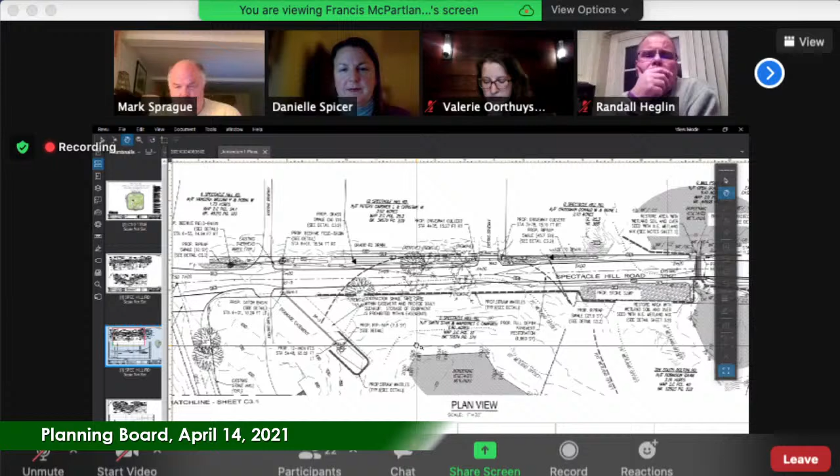Go back to the other plan that you had, the previous page. Okay, so where you have the line going down onto our property, right there. So the line that originally was there that you are replacing, and we were first told that this was going to be just a replacement of what was there, which is not what this is. But the line that is there goes, if you go towards Spectacle Hill Road following this line, and then you go straight across over to the existing...

Drainage basin? No, that doesn't exist, right? No, that doesn't. You're correct. So something this way? No, do you know, it goes diagonally across the road. If you continue the line that's on our property, if you just follow that straight and go to the other side of Spectacle Hill.

No, not that way. No. Okay, sorry, I apologize. Straight across, follow the line.

Francis, go to the pipe that you're installing on my property. Follow that pipe all the way up to the north to manhole number one, EMH1. Now there's an existing basin across the street to the north, to the left-hand side of the driveway across the street, in the vicinity of that beehive. They're right there, this one?

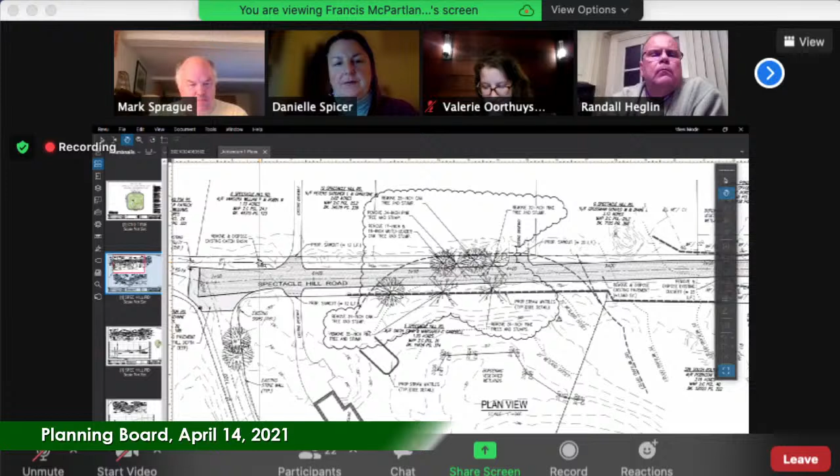If you go to the previous, it shows a pipe. There is a pipe right now that runs from there all the way underneath Spectacle Hill Road, and it's in the location where you're planning on putting the new pipe. Something like that. Yes, and I believe it's a 10 or 12 inch corrugated pipe. It's a 12-inch line.

This is what my number one concern is: we were originally told that it was going to be just replacing that line, and that's not at all what's happening here. So if you do just replace this line, you don't impact our stone wall.

If you do it the way you're talking about, going straight across, perpendicular to the flow of traffic on Spectacle Hill Road, you have to go through our stone wall. And I've also been told that you would rebuild it, but I don't see why you necessarily need to do that.

Again, the plan was, as I was told, to just replace that pipe. I think there's a good chance that if you do just replace that pipe—or maybe I don't think that's actually even necessary—that we can manage the flow now, as long as Century Mill Estates meets their requirements and keeps the water generated from their clearing on their own site.

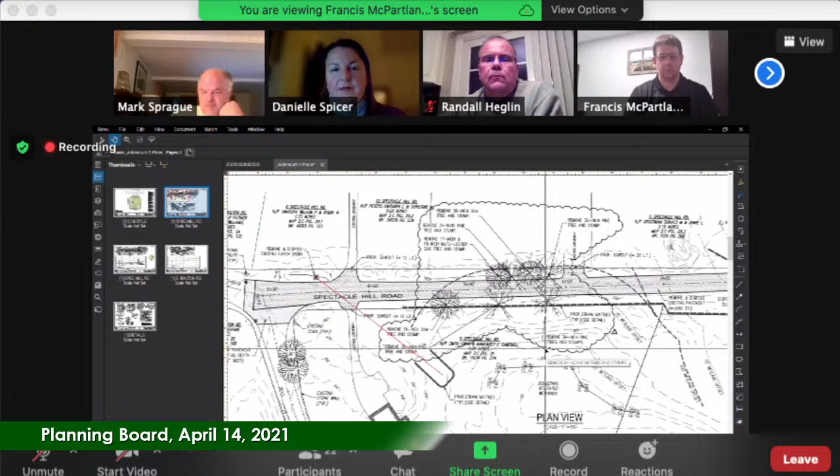What I can say about the shade trees is that this is a scenic road, as was already stated. It's one of the oldest roads in the town, and these large pine trees and oak trees that are being removed—I don't know how long ago they were planted, but they were intentionally planted along the road. There had been more of them; a couple have come down in storms. I don't want to see the trees taken down. I like the trees, I like the shade they provide to the road, and I like that the trees narrow the road. Cars travel too fast down Spectacle Hill Road and South Bolton Road.

And having a narrowing of the roadway actually visually assists in slowing traffic. I would say that we don't need to elevate the road and that you don't need the swale. The water currently does run down the road, as it has for the decades that I've lived here. I think we need to repair the culvert that is closer to the Century Mill Estates driveway so that is providing some additional movement of flow of runoff.

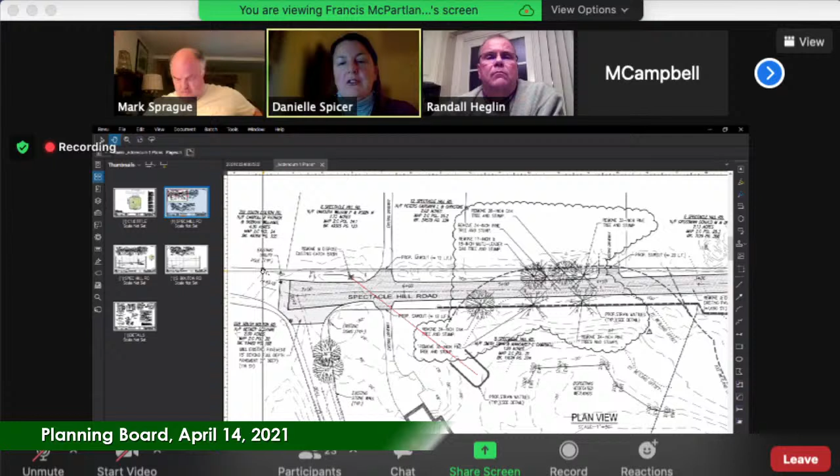And just to add on to that, I appreciate everyone's input with regard to the fact that this area might actually not be seeing as much flooding as it has in the past. That's actually very good news. I will say you don't want to take a snippet in time when we're looking at stormwater and drainage improvements and how to mitigate stormwater. You really want to look at a much larger time frame, understanding what Randall just mentioned with regard to public safety and keeping the water off the road.

I think it is important that we're looking at where drainage improvements can be done. Maybe this year isn't going to be that heavy, and we're not going to see that many rains, but the climate is going to an area where it is going to increase, and so looking at a larger time frame I think is more beneficial with regard to stormwater mitigation.

This is Gavin Robinson. I'd like to add that, as Randall noted, he's only been here for 5 months, so he's fairly new to this area and what's going on. But I would also ask, has the Conservation Commission actually reviewed the removal of the trees?

The Conservation Commission has issued a notice of intent for the project, and the tree removal was on there. So there is an order of conditions for this. The project does have an order of conditions, yes.

Okay. This is Gardner Peters with 12 Spectacle Hill Road. So 4 of the trees are right in front of our house. One of them, the one handiest or closest to our driveway, is rotted. And I've had a concern that one was going to come down in a storm. So I would love to see that tree removed. The other trees, I don't like to see them cut down, but I don't have a huge problem with it.

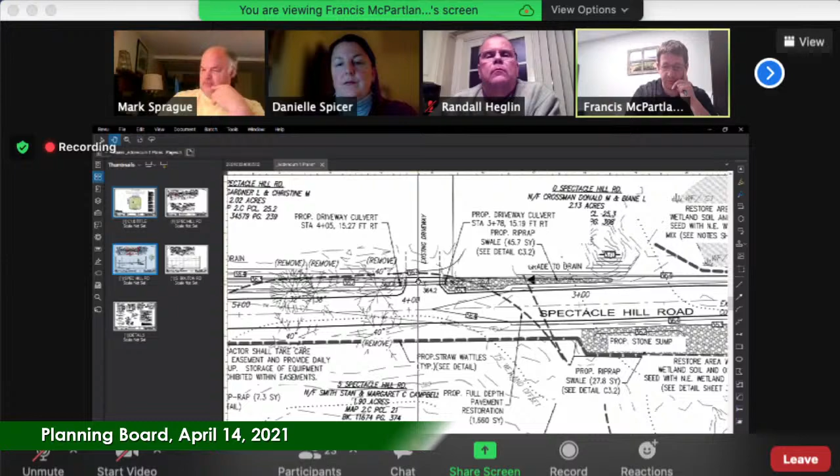So one thing that the swales are going to do on your side is help convey the runoff laterally along the direction of the road. So there won't be an opportunity for water to build up on either side, because there will be a pipe under your driveway where the road has been built up, and then it'll flow down to the Beehive catch basin at your neighbor's property at 6 Spectacle Hill. Okay.

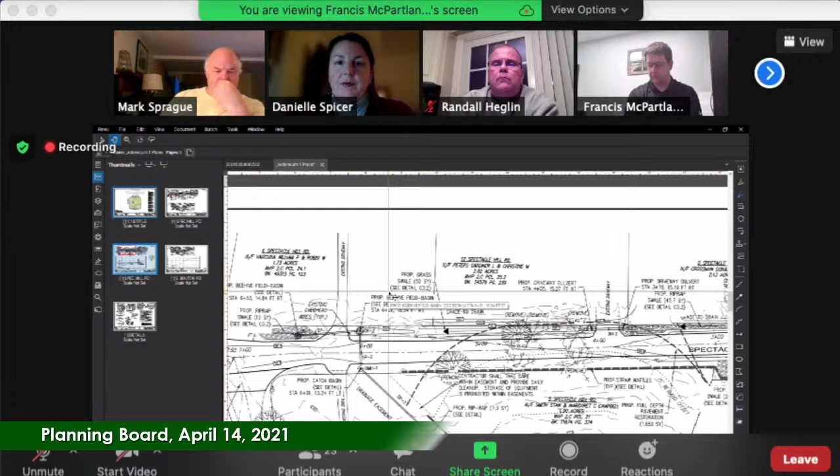All right, so we're definitely a little bit over here. So this is Margaret Campbell again. I would just like to say that if these trees are removed, I would like to ask the planning board to look at some means of doing essentially traffic calming in this area, so that the speed of vehicles is slowed. I would like to suggest a table style speed bump, similar to what was installed over in Berlin.

So Valerie, maybe you can answer this. With this being a scenic road hearing for public shade trees, I think the only thing on the table is the removal of the trees. Is the introduction of new measures allowed for this project? Can you confirm whether that would be allowed or not?

The point of the connection, though, is that the shade trees visually make the road appear a little bit narrower, and they will be eliminated. That's the point. No, I understand the point. I'm just trying to understand. I don't think we have the purview to require that under this hearing currently. But Valerie, if you could please confirm that.

Yes, so this type of permit is new to me. I will just put that out there as a caveat. But looking at the bylaw, it's very bare. It's really just looking at trees over 1.5 inches in diameter and the removal of stone walls. And so what comes out of this public hearing is essentially an agreement between the planning board and the contractor over what is to be removed.

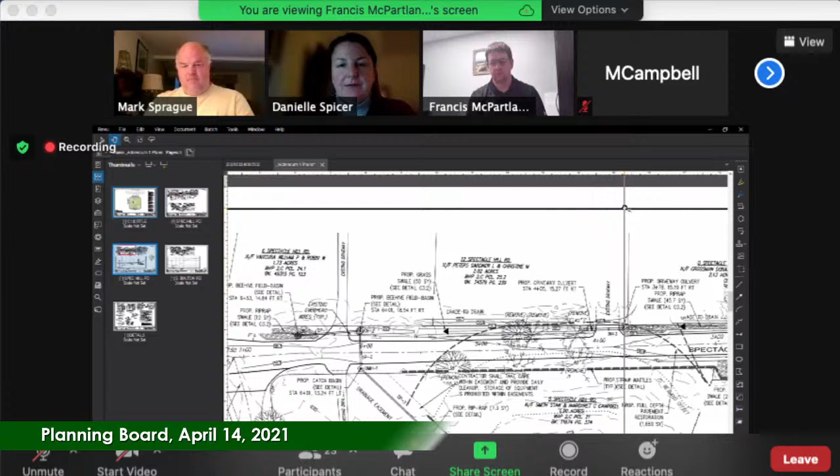Any other comments or questions from the board? When is the project slated to take off? Well, it already went out to bid, right? Went out to bid. Bids were opened actually yesterday. As I mentioned, we're under a time frame for funding, so I won't say we're under the gun, but we're pushing the calendar with regard to the funding for the project. I guess my point is, based on what the planning board has the right to do here or not, we're here for the shade tree bylaw, but I would suggest to these residents that maybe they talk to Don Lowe and continue talking to the DPW director and maybe get on the agenda of the Board of Selectmen about whether this project needs to be done or not. I don't know if that's the right approach.